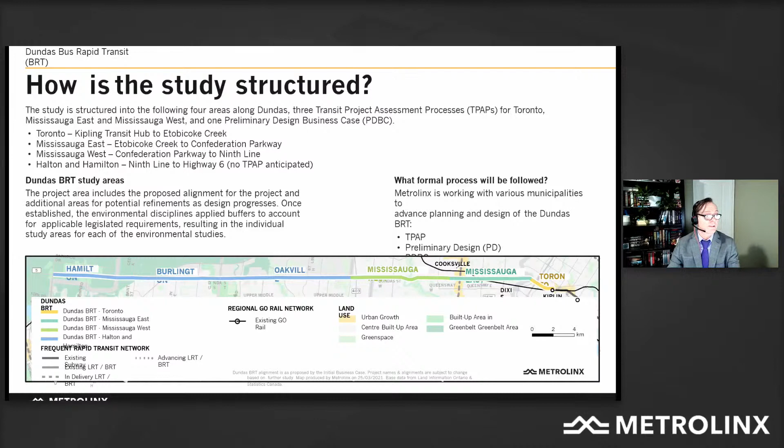So let's look at the next slide about project timelines.

In order to achieve this aggressive timing, our project team is leveraging the prior Mississauga Dundas Connects Corridor Master Plan and the planning approvals that resulted from it, to advance our preliminary design and all the environmental studies needed for the Mississauga East segment.

For this segment, we anticipate in late fall a third round of public engagement and consultation. This time we'll present the preliminary design of the alternative for the corridor through Mississauga East, and document any identified environmental impacts as well as potential mitigation strategies.

The public engagement at that time will also coincide with the Transit Project Assessment Process, the TPAP, which is an environmental assessment process with a formal initiation and public review. That public review process for the Mississauga East TPAP is expected to be completed this upcoming winter, 2021-22.

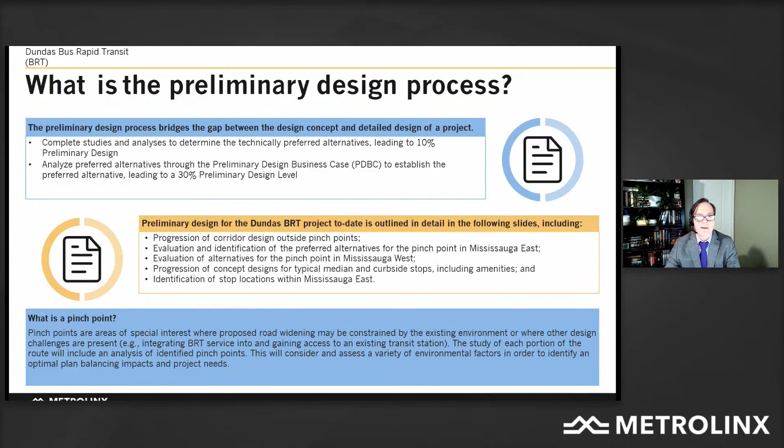Let's go to the next slide and look at the general corridor design outside of the two pinch points. The 10% preliminary design is being developed and is near completion. This design reflects the prior Dundas Connects master plan recommendations from a couple of years ago, which identified planning for dedicated BRT lanes—2 lanes in the middle of the road, plus 2 general purpose traffic lanes on either side in the eastbound and westbound direction.

It identified enhanced bicycle and pedestrian facilities, and proposed enhanced pedestrian realm and amenity space wherever possible in the boulevards. But in order to achieve these desired improvements for the corridor, Dundas Street would need to be widened to up to 42 meters wide. Achieving this would require property acquisition, with potential impacts to adjacent site landscaping, driveways, parking, and possibly buildings.

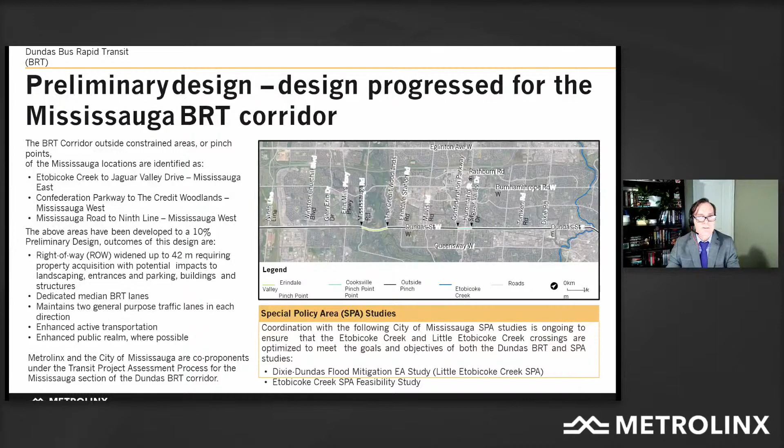It's also important to note that we're coordinating the Dundas BRT design with the City of Mississauga's 2 ongoing special policy area studies regarding flooding and drainage conditions in the area of Etobicoke Creek and Little Etobicoke Creek. So let's go to the next slide and talk about the design.

Consistent with the recommendations from the prior Dundas Connects corridor master plan, we've generated 2 general cross-section examples of what the corridor layout would look like: curbside bus operation, and a dedicated median BRT guideway in the middle of the road. It's important to note these 2 concepts are more than just about BRT transit—it's about creating a corridor that is balanced and accommodates all modes, multimodal and especially accommodating sustainable travel modes.

But in order to achieve that balanced, sustainable corridor, as I mentioned, the road needs to be reconstructed and widened in many locations with some property acquisition.

At this point, we're encouraging comments and feedback on people's thoughts on these corridor concepts that you see on screen. I would really like to get that kind of feedback.

The right image shows bus stop platforms and that median guideway. It's fully separated from traffic, and there would be medians along the middle of the road that would prohibit left turn traffic or crossover traffic, except at major intersections. This cross-section would generally be applicable to Dundas in Mississauga, east of the Credit Woodlands, except through the Cooksville pinch point, which we'll talk about in a minute.

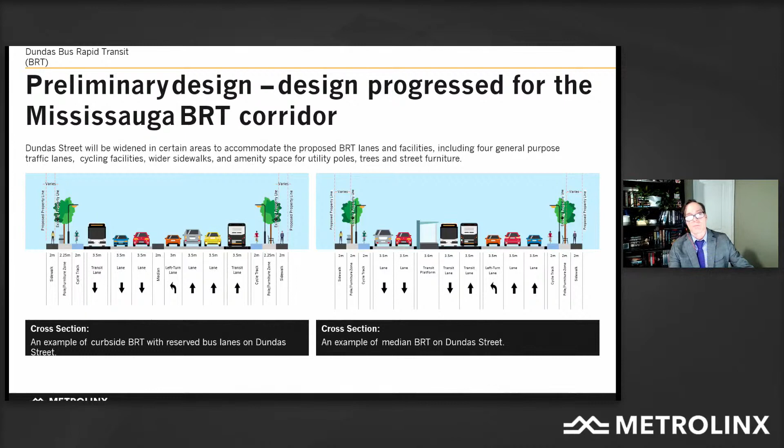The left image on the screen shows a general 4 to 5 lane cross-section corridor plus dedicated curbside bus lanes. This cross-section would be applicable to Dundas west of Mississauga Road, but again in Mississauga. Let's go to the next slide and we can talk to geometry.

This graphic illustrates the proposed changes to the Dundas Street width, or right-of-way in a technical term. The charcoal bar at the top illustrates the city's planned width for Dundas Street, and as you can see, it varies from 36 to 42 meters wide, per the city's official plan. However, the black bar just below that illustrates the approximate existing width of Dundas Street.

From Erindale Valley and through to the east, road widenings would be required in order to achieve that BRT balanced corridor vision. There are notable right-of-way width deficiencies in the 2 pinch point areas in the middle of the screen, and there's a minor road width deficiency east of Cooksville as well. Since the existing road width is less than that planned up to 42 meter wide corridor, additional property would be required in these areas to accommodate that full widened corridor vision.

But we are exploring opportunities to mitigate the potential property impact in these areas where possible, and we're doing this through optimization of the corridor plan. So instead of widening on both sides of the street, maybe you do it on the north side only or on the south side only.

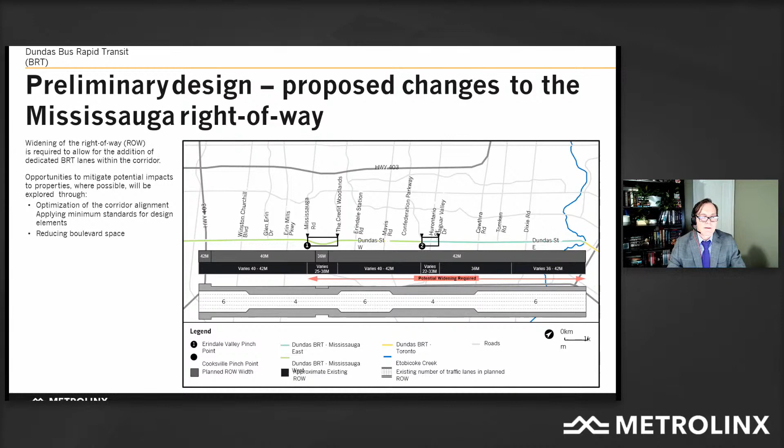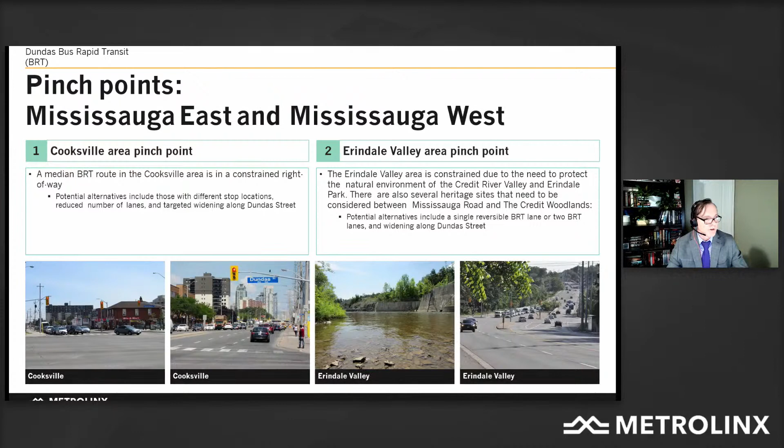Let's look at the next slide, and we'll speak to the pinch points. As I mentioned earlier, 2 pinch points have been identified in Mississauga. The first one being Cooksville, that old Highway 10 and 5 intersection, and the second one is the Erindale Valley lands around Erindale Park. We've generated alternative plans for each of these pinch points to address those local challenges and constraints in the area, and they've been subject to a multi-factor analysis and review by our team, and we'll talk about that on our next slide.

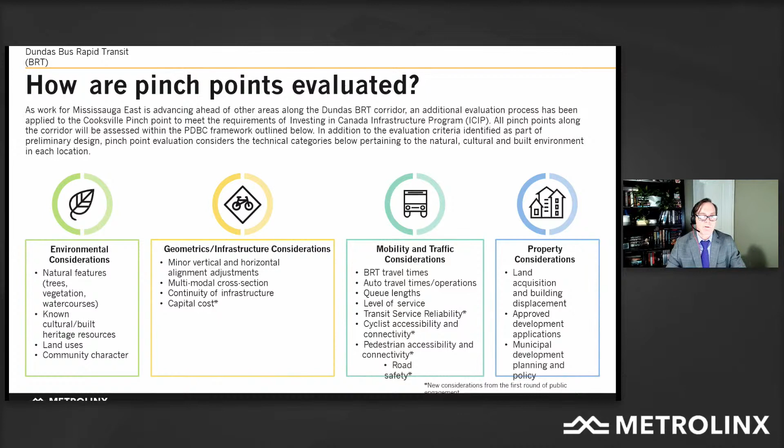The pinch point evaluation considers a variety of technical factors. It pertains to the natural environment, cultural heritage, and the built environment in the area, and a number of factors associated with that are summarized on this slide. Let's go to the next slide, and we'll speak specifically to the Cooksville pinch point.

The Cooksville area is a constrained environment through the village area, and we've defined that as from Confederation Parkway easterly to Jaguar Valley Drive. Key considerations in the Cooksville pinch point are that there's an existing very narrow road width through the area, as low as 22 meters.

In order to achieve that 42-meter planned road width that I mentioned, property acquisition would be required in order to achieve the dedicated BRT lanes, 4 traffic lanes for general purpose traffic, the cycle tracks for bikes, and wider sidewalks and better amenity space on the boulevard.

Another impact or concern would be that there's a number of buildings located close to the property line, or in fact on the property line. There's a significant amount of development intensification in the area. There's a new Hurontario LRT and that planned track and stop right at the intersection. There's a number of cultural heritage properties and resources in the area, and to a certain degree, each alternative has a varying impact on that community character of the Cooksville Village.

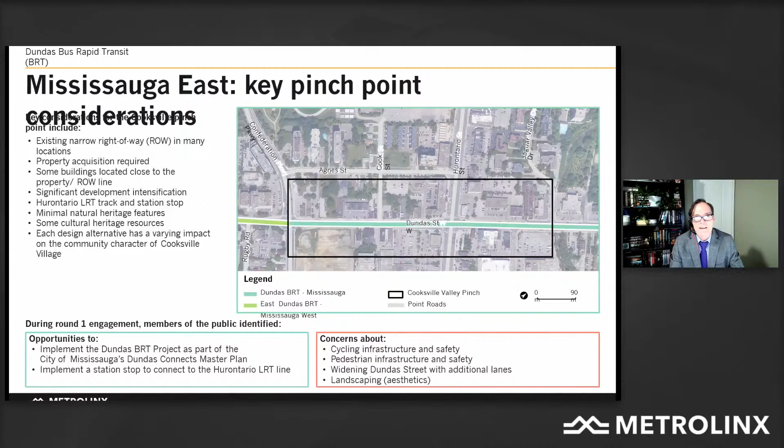So let's go to the next slide and we'll look at some alternatives.

The project team developed and analyzed a total of 6 alternative concepts for the corridor through Cooksville, and we reviewed each for drawbacks and benefits. These 3 alternatives, numbers 1, 3, and 4, were identified as reasonable alternatives and shortlisted for further study. Based on that additional review, number 1 was identified as the best performing alternative in our current work.

Alternative 1 is the full median BRT. It's widened about the center line with 2 traffic lanes in each direction for general purpose traffic, and it's got cycle tracks and amenity space on the boulevards. This is actually the alternative that was recommended in that prior Dundas Connect study that I mentioned earlier.

Alternative 3 in the middle is similar to alternative 1, but it actually prohibits and precludes any left turns at Hurontario, so there'd be no turns at the intersection there. Number 4 is reconstruction of Dundas Street through Cooksville to provide cycle tracks and better amenity space on the boulevards with wider sidewalks, that sort of thing, but buses would operate in mixed traffic and be subject to delays associated with regular traffic congestion. So we'll walk through the next couple of slides and the 6 alternatives at the pinch point.

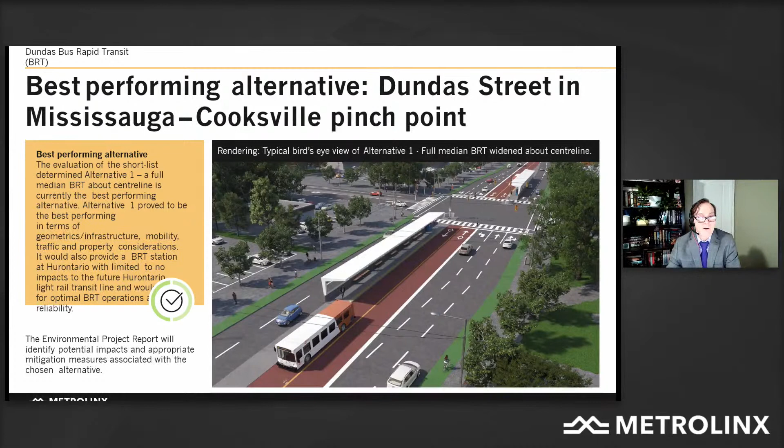With that, we encourage the community to review and comment on the alternatives and the evaluation information we presented here, but there's much more on the project website. We encourage you to review that and provide feedback to our team, as it'll be valuable as we move forward into our preliminary design and next project stages.

Let's move to the next slide and talk about Erindale. We've identified a pinch point in the Erindale Valley area, defined as from Mississauga Road through to the Credit Woodlands on the east side of the valley.

Key considerations in Erindale Valley and this pinch point are, again, that property acquisition would be required to achieve the planned city Mississauga Road width of 36 meters, in order to accommodate all the infrastructure elements mentioned before: the BRT, four general purpose traffic lanes, bike lanes, and better boulevard space.

Another issue in the area is that a number of buildings are located close to the property, and many of these are actually cultural heritage resources, with cultural heritage landscapes in the area as well. Finally, there's a significant natural heritage feature in the area through the Erindale Valley and the park.

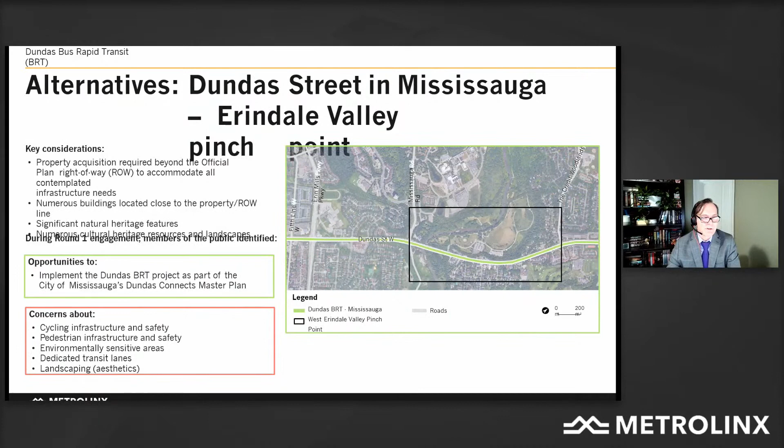Let's go to the next slide and look at some alternative concepts. You can see here we've done up two concepts for Erindale Valley. Alternative one on the left has a reversible BRT lane in the middle of the road.

So what that means is, for instance, in the morning eastbound buses would be in the guideway, but westbound buses would be in mixed traffic going westbound. Later in the day, the operation would flip—say for the evening rush hour, buses would be in the westbound direction in the guideway, but eastbound buses would be in mixed traffic going eastbound.

This was the recommended alternative in the prior Dundas Connects study, premised basically on reducing impacts in the valley lands. However, we're revisiting that conclusion to consider the benefits of providing dual BRT lanes through the Erindale Valley lands, in order to quantify the benefit associated with better service from a two-lane guideway. That's the alternative you see on the right side of the screen, alternative 2.

Again, we're seeking community input and any comments on these two concepts, so please feel free to provide feedback through our website or ask questions.

The next slide, we can look at corridor planning and bus stops, the BRT stops. The form, the scale, and the amenities at each BRT stop will consider the anticipated ridership in the area at the stop, as well as existing infrastructure in the area.

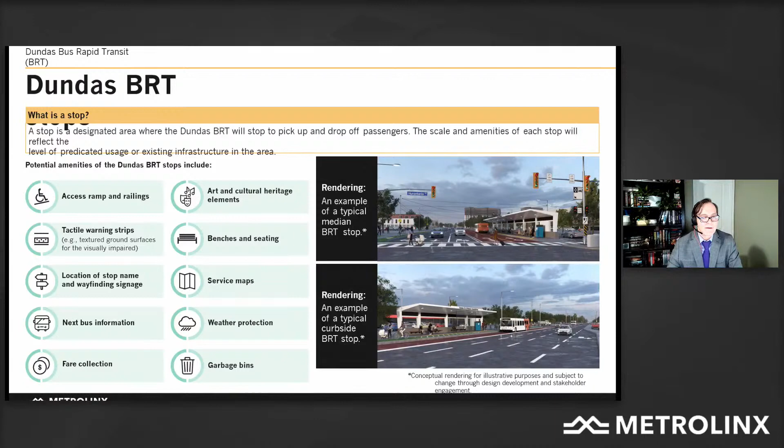BRT stops are typically spaced at a greater distance than conventional bus stops, tending to be about 500 to 1,000 meters apart. This helps maintain higher average bus travel speeds for transit and ensures better service reliability because there's less stopping associated with more frequent stops.

Our project team has identified a number of BRT stop locations based on balancing access to the corridor versus better travel time for transit in the actual corridor. These stop locations were based on a number of factors that you can see here.

First, the number of stops and stop locations identified in the Dundas Connects master plan study. We considered intersecting transit infrastructure and bus routes that form the basis of a feeder network in the area, as well as the Hurontario LRT coming in the future. We also considered the distance between stops and looked at land use and major trip generators in the area.

In total, for Mississauga East, 8 bus stops, BRT stops, have been identified, as you can see here. We would like to welcome any kind of feedback or public insights or comments on these proposed locations and the bus stop amenities that we talked about on the last slide.

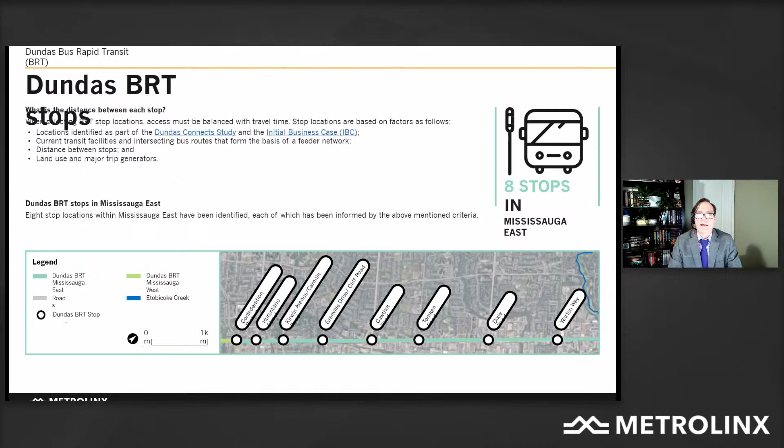Let's move to the next slide and look at Hamilton and Halton. In this area, a number of environmental assessments have already been conducted to support road widening projects. In Halton region, curb lanes have been identified to accommodate potential high occupancy vehicle lanes, HOV lanes, which could be converted to dedicated BRT or bus-only lanes.

Our study will be evaluating converting the future HOV lanes to dedicated curbside BRT lanes, as part of a variety of transit service concepts we're studying. This will also engage the local transit service providers through Hamilton and Halton, and we will present that at a future round of public engagement.

In addition to considering the conversion of HOV lanes to dedicated bus or BRT lanes, we're also considering improvement strategies for the corridor, such as queue jump lanes to get a bus quicker through an intersection, as well as smart traffic signals to prioritize bus movements. The team will continue to review these transit improvements and options, and also determine stop locations in Halton and Hamilton, presenting that at a future engagement.

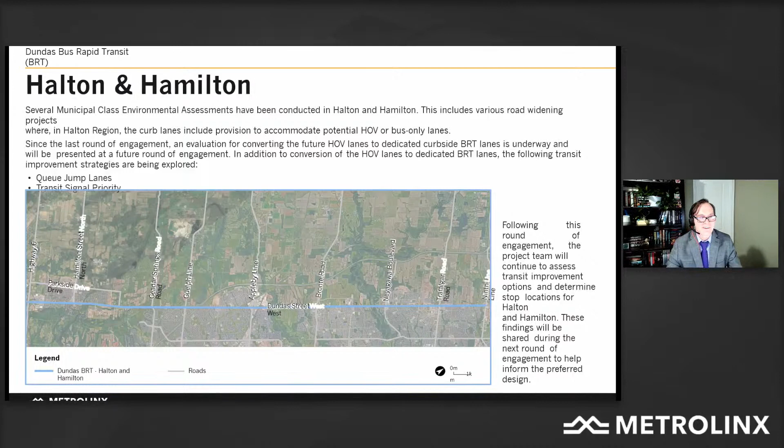Let's go to the next slide. The next round of public engagement is planned for late 2021, when the Mississauga TPAP is scheduled to commence. For this, the project team will continue to complete environmental studies and proceed with the design of the BRT corridor in the area.

For the Toronto and Mississauga West segment, we will continue to develop and assess the pinch point alternatives to determine the technically preferred design. We will continue with environmental studies to identify impacts and mitigation strategies, and we'll also host a public engagement in the winter of 2022 to present design alternatives and the evaluation.

For Hamilton and Halton, we will begin to identify BRT stops and transit priority measures, and host a public engagement targeted to that geographic region in mid-2022. And that's it for me. Thank you for listening. And now I'll send it back to you, Joseph.